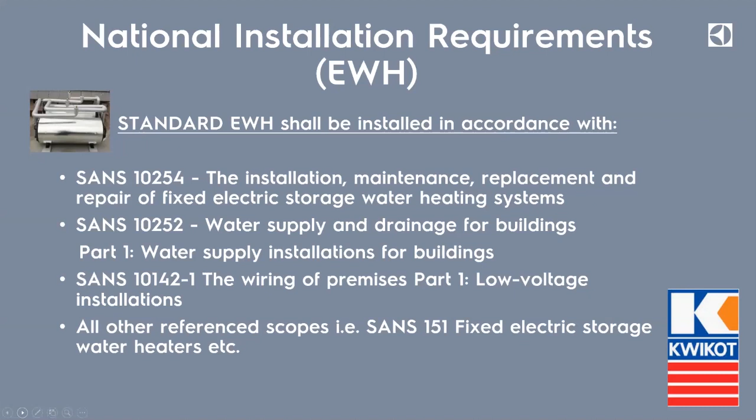All other reference scopes, SANS 151, fixed electric storage water heaters. So all cross references need to be taken into account. And then the national requirements on solar installations, obviously 10106, 10252, so all applicable. SANS 10142 Part 1, again, electrical connections and all other reference scopes.

Okay, the warranty and installation manual. Now, the main purpose of this manual that we supply with the product, we need to supply the client with a manual on how to maintain the cylinder. So to the installer, the installation requirements for the warranty purpose. So we tell you how the geyser must be installed, what is required, and you as the installer, obviously putting yourself out as a competent person for the installation, will hand this to the client.

For the client, it's the instructions and information required for the operation and maintenance of the water heater, so meaning the anode service, the required components on the installation, and then obviously having the details of the cylinder, your details as the installer being handed over to the client.

And to us as a manufacturer, this is just to say that you have met the requirements, your clients have been advised regarding what's required on the installation, and have these requirements been met. So the warranty manual is quite an important document and also a legally binding document that you hand over to the client.

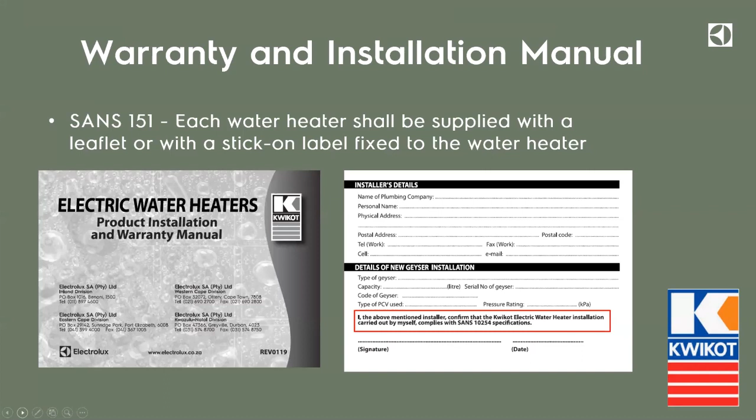Warranty and installation manual. Now, I took a summary out of our warranty installation manual, and it says here, it's the installer's responsibility to meet the installation requirements. All right, so you tell the client that you've done it in accordance with regulation and with the manufacturer requirement.

The warranty is calculated from the manufacture date on the sticker or the date of installation. So let's say the geyser was on the shelf for 4 months and you can provide us with a plumbing invoice to say, I only installed the geyser on this date, then we are willing to work from the date of installation. The replacement geyser warranty.

And this is an important thing where many clients are not aware of and has not been explained in advance to them upon fitment, is that on the replacement geyser, we do not offer you a new warranty. In fact, you get the remaining balance of the original geyser's warranty which the client has paid for.

All right. And then water quality is also another important point, as set out in our terms and conditions as well, it's subject to municipal supply. Yes, borehole water, we will still honor the warranty. All we ask is that you furnish us with a document to say at least you've conducted an annual service on the water heater.

And then other key manufacturer installation requirements. We'll get into that further on the next slide. And product warranty periods. Obviously, we've got different products in the market carrying different kinds of warranties.

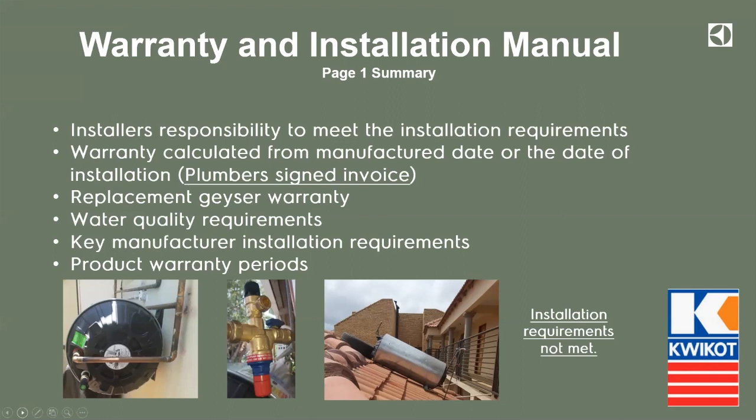Right. Now this is page 1 of our warranty booklet. I just highlighted some points. And this is important, once again, to make sure that the installer, as you read, Electrolux makes no warranty representations in respect of the installation of the water heaters. Claims in respect of the installation of the electric water heater must be referred to the applicable installer.

So that means you as the plumber who did the installation for the client, who shall solely be liable under any installation warranties given. Meaning make sure that the geyser installation is 100% compliant. In the event where it isn't as set out, you'll need to give the client written notice to say, listen here, as per the regulation on my COC, these are the points of non-compliance.

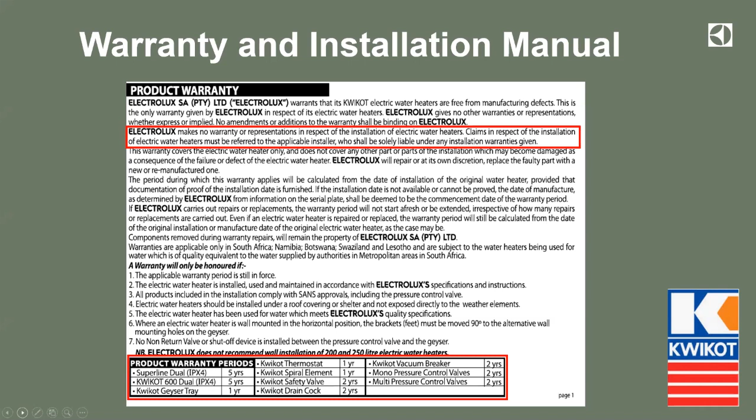At the bottom of the page, you can see the warranties on the products, thermostats, elements, drain cock, safety valves. So that will give the client a clear indication as to which component is still under warranty, should there be any claim that she would like to submit for an error that arises.

Warranty and installation manual. Genuine KWIKOT branded products to be used. Meaning KWIKOT safety valve on the geyser. Do not extend safety valves. We get that a lot in the market where the probe is not actually submerged in the cylinder. Cross-fitting of components. Yes, if it is long enough, the probe fitted, but we prefer genuine KWIKOT branded products as set out. Vital. Installation to be done in accordance with the SANS 10254 regulations.

Here's an important thing. Repairs to be done only by Electrolux or authorized agents. If the geyser is on warranty, please do not tamper with the product in any way. Do not remove it from installation. I know a lot of times a client will force you to remove the geyser, rather log a call and make the client aware prior to fitment, please.

And then servicing and replacement of the anode is an important thing to have protection inside the cylinder. Make sure that this is carried over to the client. A lot of clients are not aware in the market that the geyser actually needs to be serviced. A lot of clients we speak to as well, the geyser, that's vital. The anode on a 1 to 3 year interval, depending on the ppm, parts per million.

Okay, and then the KWIKOT installation kit. Also another important thing when you do heat pump or any retrofitting connections to the geysers, make sure that you use the genuine parts on the cylinder, please. And not just be out in the middle of a pipe somewhere. Do it in accordance with what is required on the installation and for the product warranties.

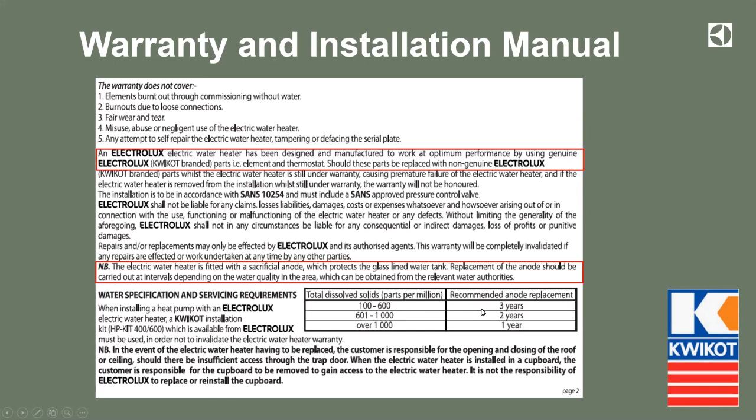And then the electric water heater is fitted with the anode as discussed. There you can see it in the warranty booklet. And there's the PPM, and that's important, where it tells you the service intervals for the geysers. So make sure that you make yourself aware of this.

We get a lot of installations where there's a 600 kPa valve on a 400 kPa geyser. The geyser tag is color-coded, it is red, it states on it, it's 400 kPa. Please check the valve. I know it's been installed before. You maybe just go and change the geyser. Please check the whole installation and not partial. Vital.

Right. Then the TP overflow pipe must be self-draining. It mustn't be threaded at the ends and must be open to the atmosphere. So make sure that it doesn't run at a 90-degree vertical riser. That we get a lot in the market. Make sure that you do furnish the client with the COC with non-compliances.

Should you not be able to do it where it's in the middle of a building, make sure that the client has been informed, and that when we get there for a warranty claim that we've got a COC of non-compliance for a pre-existing condition, please note it down. And then here we get to the unobstructed access, the 300 and 450 millimeter requirements, which is, like I said, it's vital.

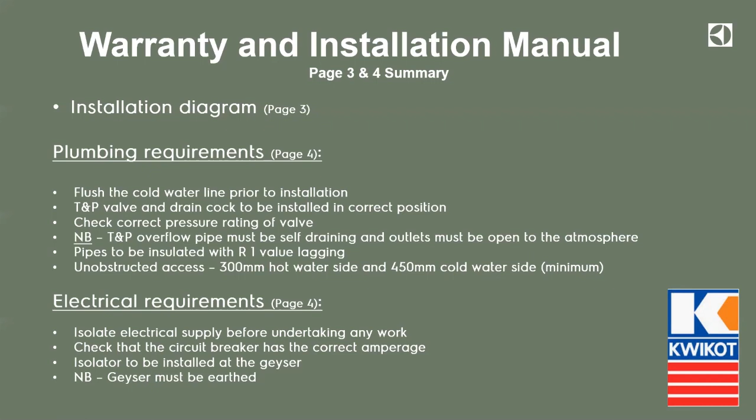And the geyser must be earthed. That is a very important point. A lot of geysers we get to are not bonded at all, not bonded correctly as set out in the regulations. Use the copper strip, not just a thin piece of wire hanging around loose in the roof. Do it correctly as per the requirements, please.

Here is the geyser installation as required. As you can see, there is the RR port, renewable port for your return from a solar heat pump. And obviously in conjunction, if you want to add a solar heat pump, you'll just use the combination drain cock on the front cold inlet connection. Basic installation specifications. Now, a lot of plumbers also ask regarding the position of the pressure control valve.

Now, most of the instances, we find that the pressure control valve is right at the geyser where the T is going down into the drain cock. Please space it a bit further away, some absorption, some heat loss through the pipe before it gets to the pressure control valve. Sometimes we get that the pipe rising up there is quite hot, especially on unbalanced installations where the pressures vary more than 20% on installations.

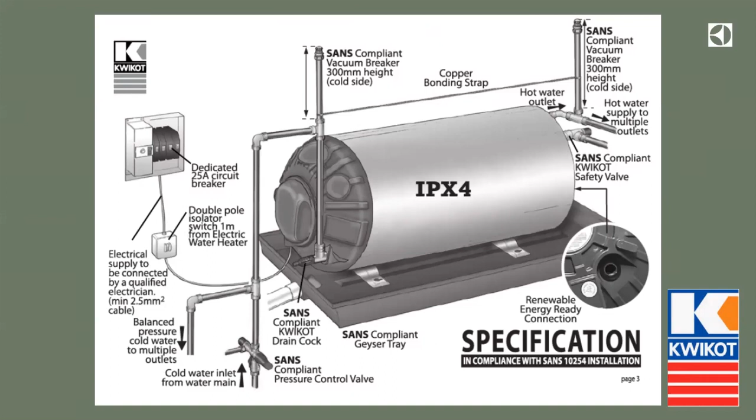We get non-return loss. So yeah, give it a bit of space between the inlet and where the actual position of the pressure control valve is, and try and put it over the tray. So should there be a leak on a nut or anything, at least there's no ceiling damage to the client's property if it's installed inside. This is what we've discussed now. This is just the full warranty page.

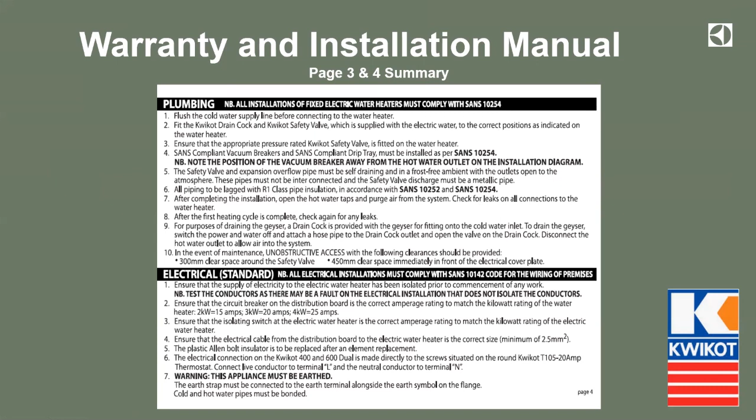Regarding the plumbing, regarding the electrical, giving you a detailed explanation of what is required, the type of lagging to be used around the pipework, around the geyser, and the R1 value is important, as that's the spec. And then again, it's your access, your heating cycles, checking for leaks. And then getting back to the electrical as well, tells you the actual sizing for which rated kilowatt of element you're using. And then all the bolts that need to be used, the bolt insulator to be replaced after the element replacement, the electrical connection on a 400 and 600 dual. Right.

Here is the installing details, completion of your installation again, as per the first picture. Remember to do this, please. Okay, here's the warranty void guide summary. So these are just a few points we are looking at when a warranty claim is submitted to us, just to make sure that the regulations have been followed and also the manufacturer requirements have been followed through on. So no serial plate or serial plate tampered with.

Now, we're getting cases where a plumber goes to a client, pulls off the serial tag, hands it to the client. Not acceptable. Do not tamper with it, rather take a photo if the client would like a picture of it, or the client should have the warranty booklet, as we said now, with the details already in it. So there is no reason to pull a serial plate off a cylinder. All right, if it's faded or unreadable, once again, proof of installation must be furnished to us in order to

validate the warranty. Then IPX1 geysers: the new geysers, IPX4, can be installed outside. IPX1 geysers are only for internal installation, mainly like the 450 liter geysers, must be covered, not exposed to the elements. And then if a geyser is tampered with, so let's say a client used silicone to seal the gasket, not acceptable. Do not tamper with it in any way.

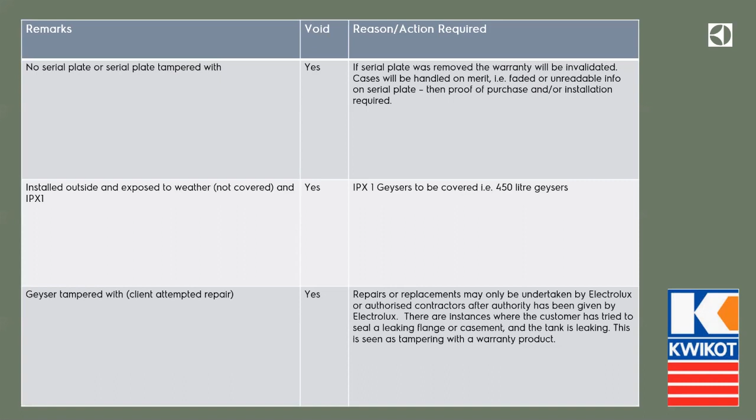Element burnt out or dry burn. Now, this is quite a good point, and I'm going to get stuck on this one a bit. We get a lot of calls where you as installer filled the geyser, you know you didn't switch it on prematurely, the element is dry burnt. We get there. Test the installation upon completion. Make sure that the 300 minimum, remember the recommendation is 300 millimeters. Test the installation. No installation is the same as the other.

So upon completion, isolate the water supply, test and see if the geyser is draining if you open the cold water. We get a lot of calls where we get to a client, geyser's been installed 4 days ago, the element is dry burnt, operated without any water present. I can't say that it was switched on prematurely, but I know the only way you can dry burn an element is if it's not submerged. So check it, make sure that the vacuum breaker height is sufficient on the installation in order to stop any back siphonage from the cylinder if the water supply is interrupted. Very, very crucial point there.

Geyser removed from installation. Do not remove a geyser from installation. Once it's installed, it's under warranty. It becomes the manufacturer's responsibility, providing that installation has been done correctly in terms of SANS 10254. Do not alter the installation. And please, if you want to make the geyser installation safe for the client, do not cut any pipes. Stop it where it fits onto the drain cock. Stop it where it comes out the hot water outlet. That's how you make a geyser safe, so we can reconnect, test, and confirm.

Where there's insufficient access to repair or replace faulty items, the geyser must be accessible and it must be done at the client's cost. We will not provide access by any means. If it's a tiled roof, that's the only exclusion that we are willing to look at. If it's a standard tiled roof. No zinc roofs, no cupboards will be unscrewed or removed in order to gain access to a geyser. Geyser must be easily accessible and maintainable.

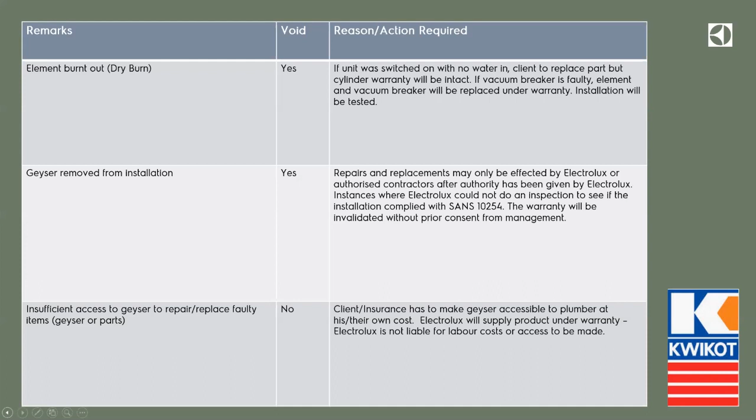No pressure control valve fitted, all right, or no expansion relief. It's a requirement. So if you're feeding from a booster pump, at least I know the pressure is regulated from the booster pump, just put in an expansion relief from the cold supply. We are willing to accept. Also, a stopcock, NRV, non-return valve, any flow control device, or any one directional device installed between the geyser and a pressure control valve will not be accepted.

We will still accept a lever ball valve as there's no directional point through it, but any other flow control device will not be accepted between a geyser and a pressure control valve. If you've got a water meter, for instance, let's say you've got a pressure control valve downstairs, you've got a water meter installed after the pressure control valve, we will still require an additional expansion relief valve installed thereafter.

So if you would like a stopcock at the geyser, but the pressure control valve is outside, all we are requesting is that you put an additional expansion relief after the stopcock, please, to have it compliant, and we will accept.

Right, no safety valve. Make sure that there's a safety valve on the geyser. We had a few where it's blanked off on the safety valve connection. Quite shocking, but yes, please check this. No vacuum breakers on a leaking geyser.

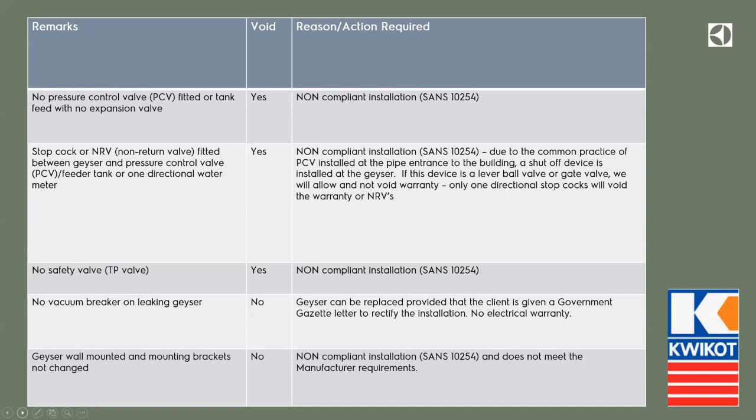Remanufactured pressure control valves. We do not accept remanufactured pressure control valves. We want SABS approved products to be used on the installation. KWIKOT will not honor a warranty if there's a remanufactured pressure control valve.

So please, if you're doing installation for insurance and you just have to replace the cylinder, please do take the effort of checking the valve as well and make the recommendation to the company that appointed you as the installer to say, listen here, this is a requirement for this client. We need to replace the valve in order for the client to qualify for the warranty.

And then 200 and 250 liter unit wall mounted without special support. We do not recommend a 250 liter to be wall mounted in any instance. There is a floor stand for a 250 liter. 200 liters, yes, we still accept, providing that there's an additional support under the cylinder. So the geyser can still be mounted against the wall, with additional L-shaped brackets as a support under the geyser. Make sure that this is done.

Then plastic pipes, galvanized pipes fitted onto the geyser, union type Conex fittings. Important. We get a lot of geysers where solder fittings have been used directly onto the cylinder, not union type fittings. Now, obviously, it needs to be debrazed and so forth. We require union type fittings for connections for ease of maintenance purposes as well.

Galvanized fittings we do not accept on the geyser, on the threads. We do not want any galvanized on the geyser. Make sure that you use brass connections onto the cylinder. All right. And if there's any multi-layer pipes, make sure that you use copper at least 700 millimeters away from the outlet side and connecting onto the geyser on the cold water side. Like I said, the drain cock is a union fitting, so there shouldn't be any problem there.

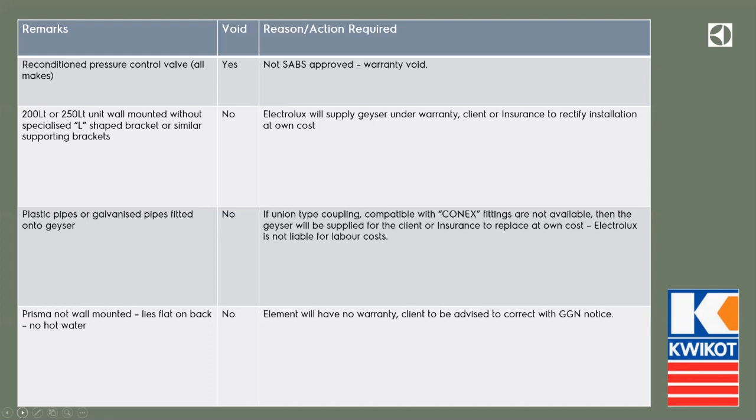Right, a bit of Prismas: it's to be wall mounted. We supply it with a bracket. If it lies flat on its back and there's no hot water, we can still look at it. But there will be no electrical warranty; it will be charged to the client or referred back to the applicable installer, and the government gazette notice will be issued to the client to make him aware of this problem or the incorrect installation. And also take note that it needs to be installed with a vented mixer that's open to the atmosphere.

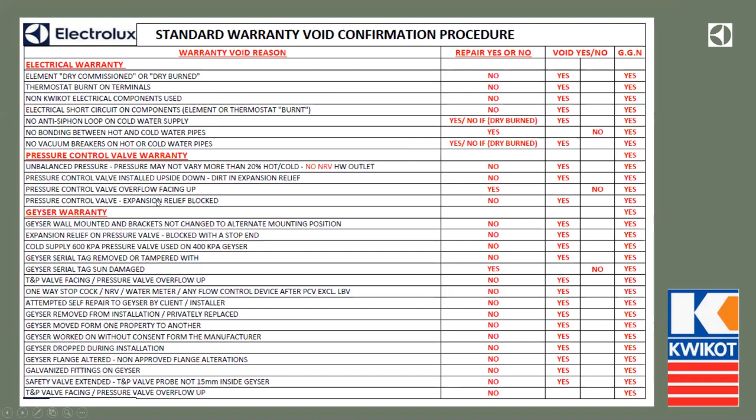Right, here's just what we use in the office, more or less just a summary of what we look at: dry burn. This is a guide that we give to our technicians and some of our agents as well. What to look at, we look at bonding. I'm not going to go into too much detail. These are based on the guidelines of the SANS regulations and also the manufacturer regulations, which we've reviewed.

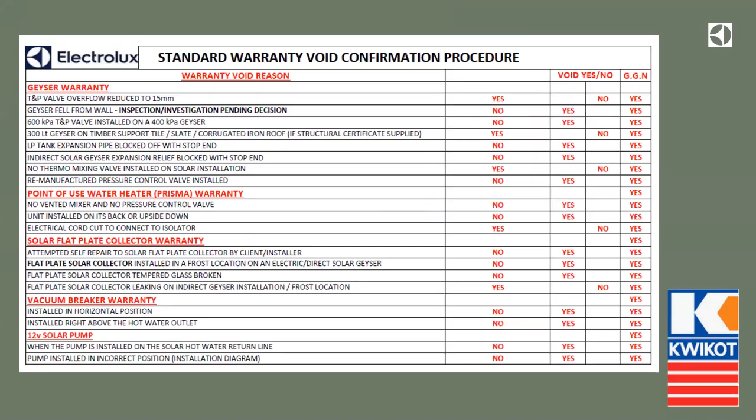And then the conclusion: all installations are to be done in accordance with the relevant national standards and ought to meet the manufacturer's requirements. Any non-compliance must be given to the client in writing, and the end user or consumer safety must be regarded as higher priority. So at the end of the day, you as a qualified installer, first thing you take into account is: is this a safe installation for me to do? And secondly, is this a safe installation the way I'm going to do it for my client?